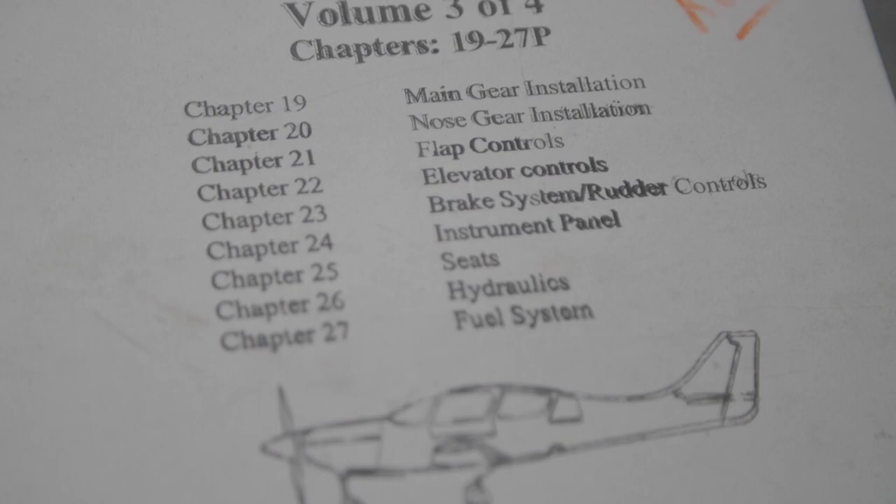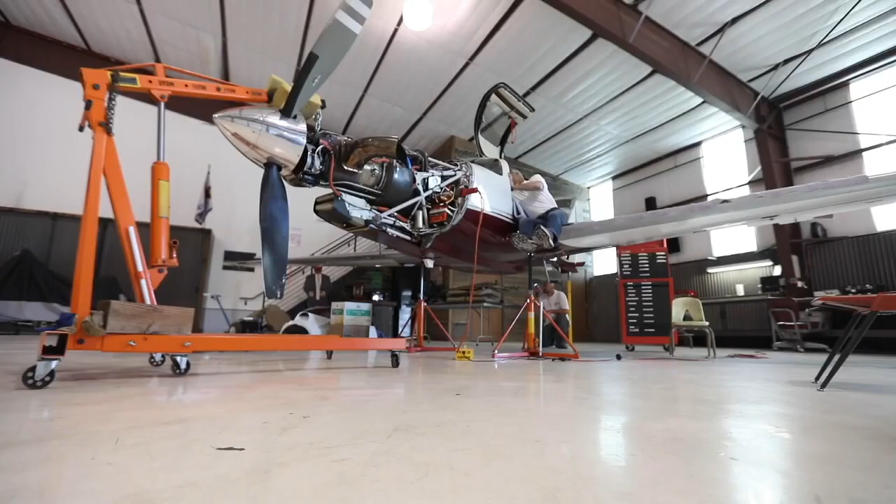I wanted to start a video and cut it up into segments to show you and illustrate some service work that should be done on all Lancair aircraft that have a retractable landing gear with the over center links. We have found there have been quite a few insurance claims over the years. Probably the majority of our claims are from the nose struts collapsing and the airplane going over on its nose, which causes a pretty good insurance claim, probably the largest claim across our fleet since these airplanes began being built.

I'm going to start by dismantling my airplane, taking the cowlings off, exposing the landing gear, putting the airplane up on jacks so that I can cycle the landing gear. I'll take you step by step through some checkpoints and service points, some recent modifications that Lancair has worked with us to come up with to make these nose struts more robust. Stay tuned and we'll go to the next slide.

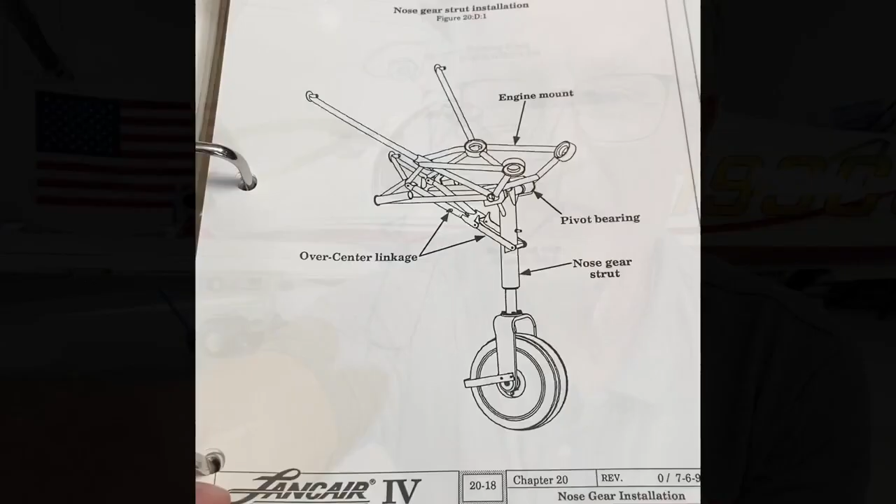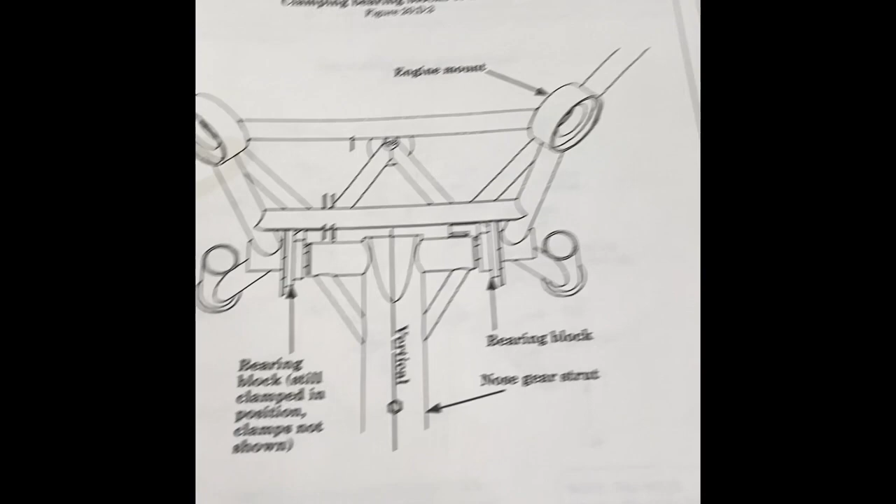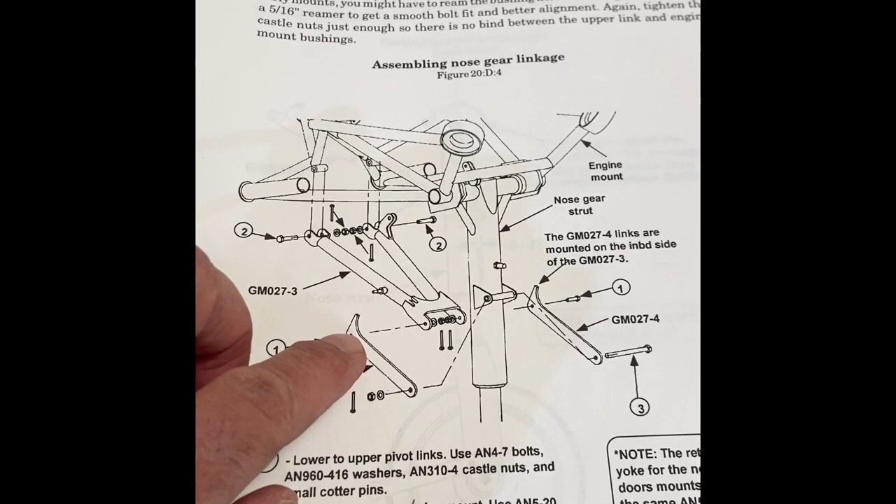Just to give you a little situational awareness, I have opened up the Lancair Build Manual, Chapter 20-18. You can see the over center links here, the upper over center link and the lower over center link. Here's a forward view, and we'll be talking about some space right in here and here that sometimes occurs and allows this whole strut to shift back and forth left and right. We're going to be replacing these with a much more robust fixture from Lancair.

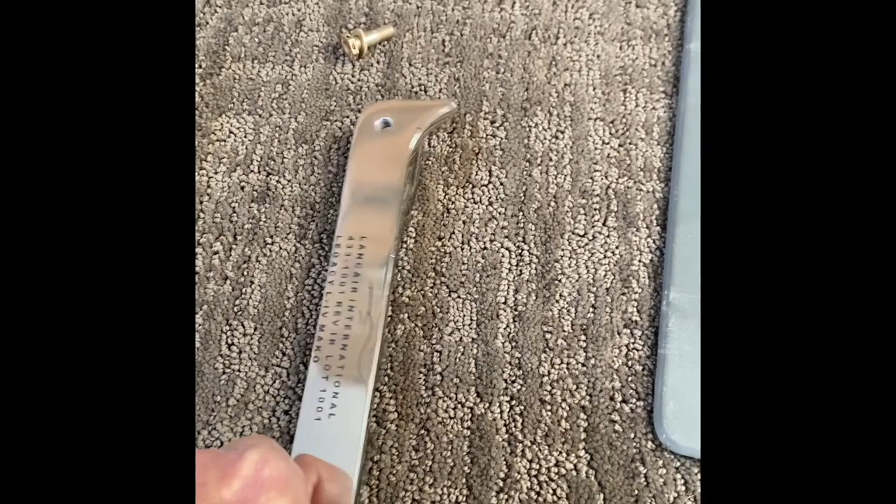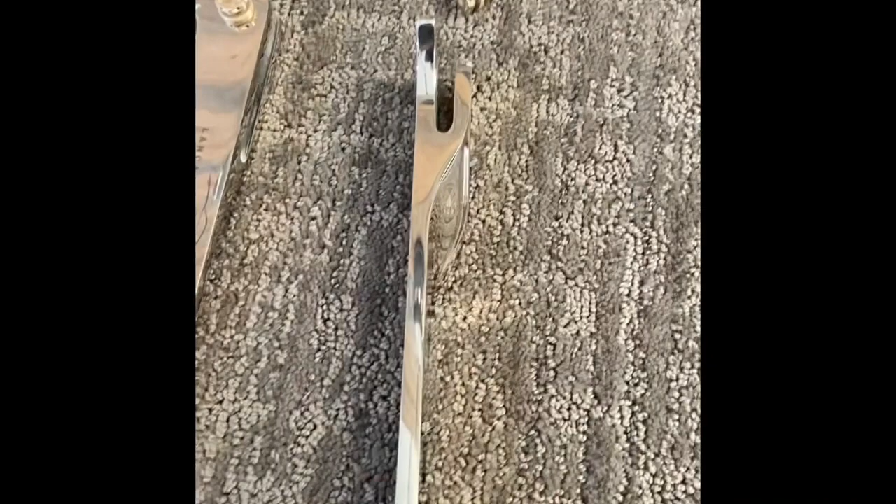Here's another picture of the side view of those over center links, upper and lower. Over here laying on my bench is the new, beautifully polished over center link. If you look at it sideways, you'll see how we've beefed it up. It's not just one piece anymore, you'll see it's now two pieces, equalizing the load on the bolt here, which was part of the problem in the past where the over center links have given way and the nose wheel has collapsed.

You can see that this bolt goes through here and screws in, and then it's safety wired into this hole here. I mentioned earlier on the strut, these are some spacers that have been homemade to take out some of the slop on both sides of the main strut mechanism.

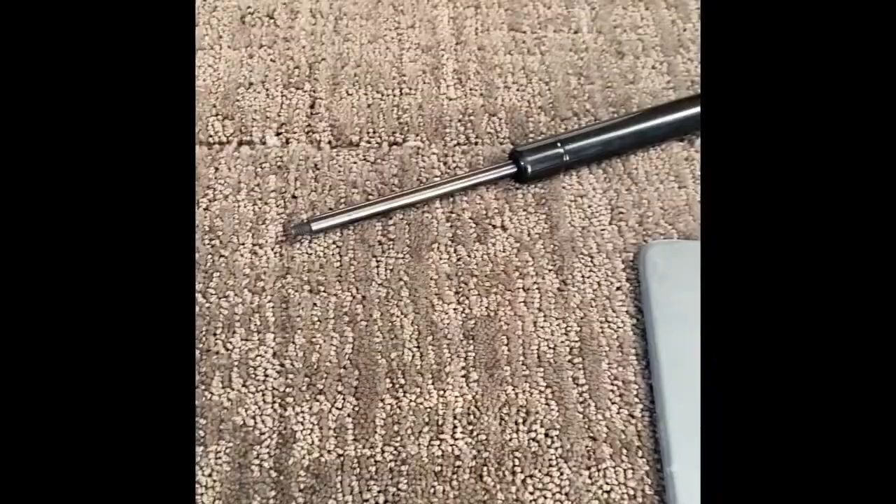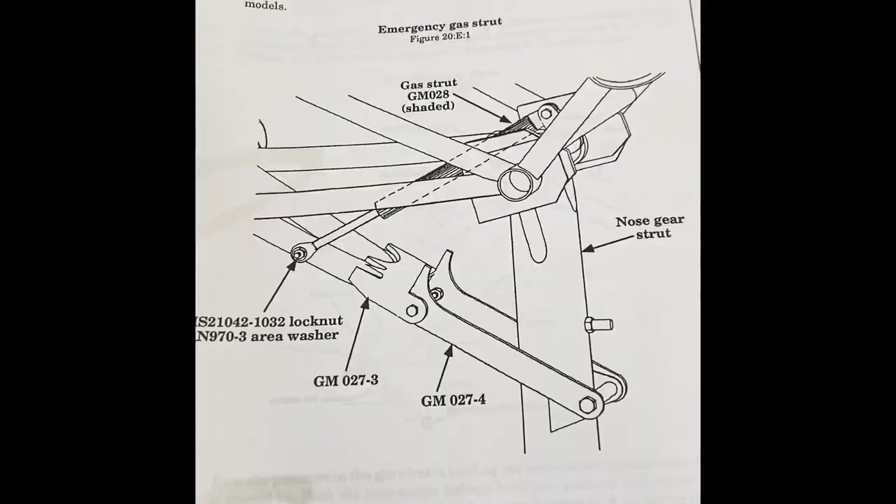A gas strut that we will be replacing, while we're at it, with a brand new strut, 100 pounds or more. Here's a quick shot of the gas strut we're going to replace with a brand new one. Periodically, you need to test that at annual or whenever you're servicing that nose strut to make sure it hasn't lost its pressure, because that's your emergency gear extension for the nose strut.

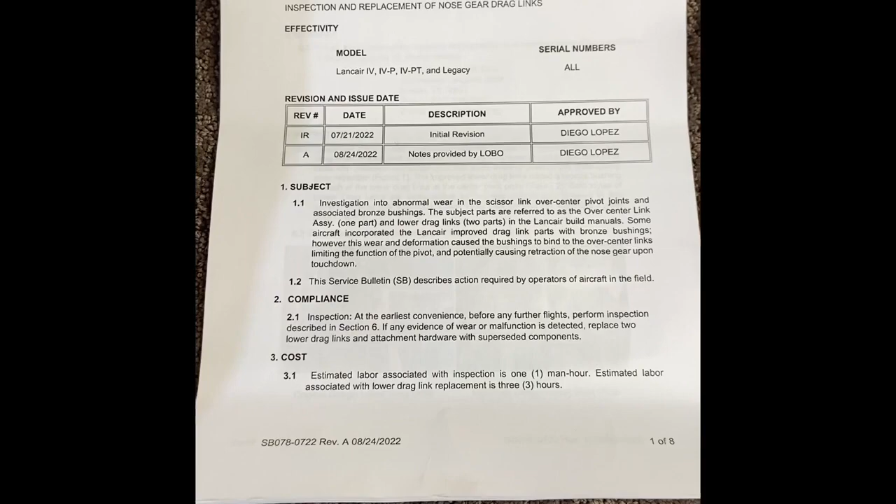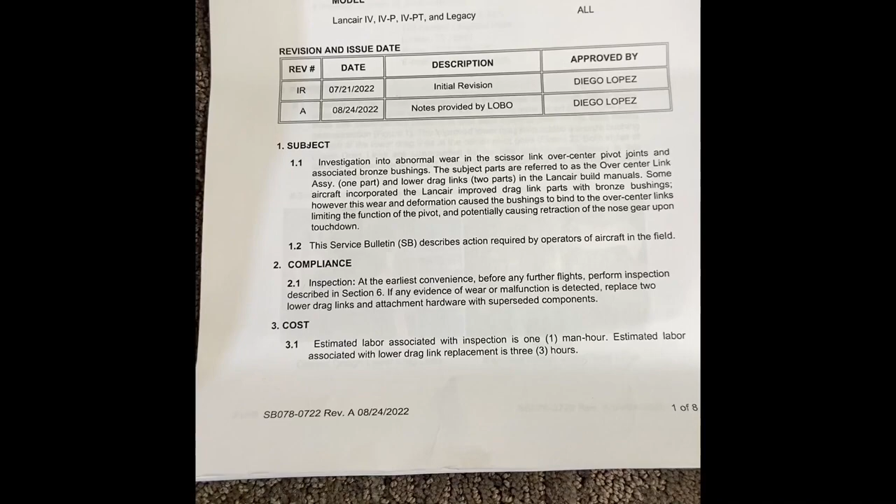At the end of this presentation, I encourage you to go to Lancair's website and make sure you download the brand new service bulletin 078-0722, which illustrates the installation and step-by-step process of what we're going to go through today. Just a quick overview of my airplane before we start removing the upper and lower cowling.

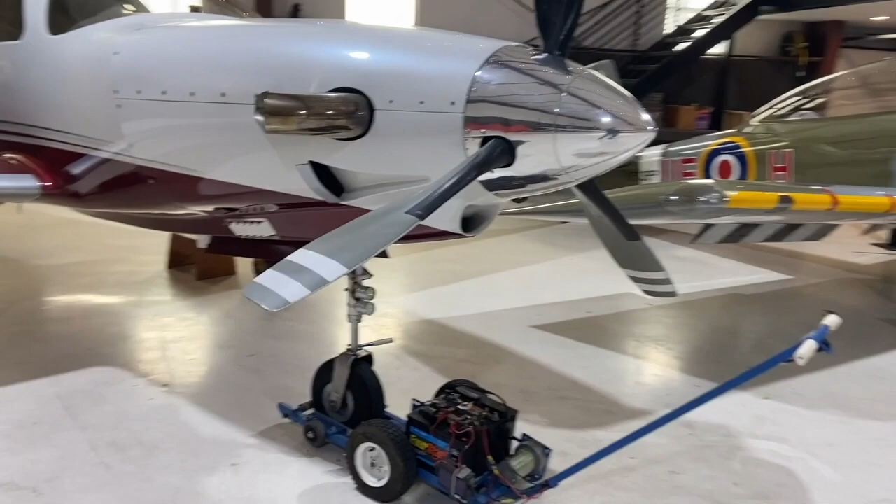I have now removed the upper and lower cowling and raised the airplane on its jacks, ready to cycle the landing gear if I need to. But for right now I'll just come into the airplane and show you a couple of the items and where they're located. Down here lower is the upper and lower over center link, and this is the lower center link that we're going to be changing out.

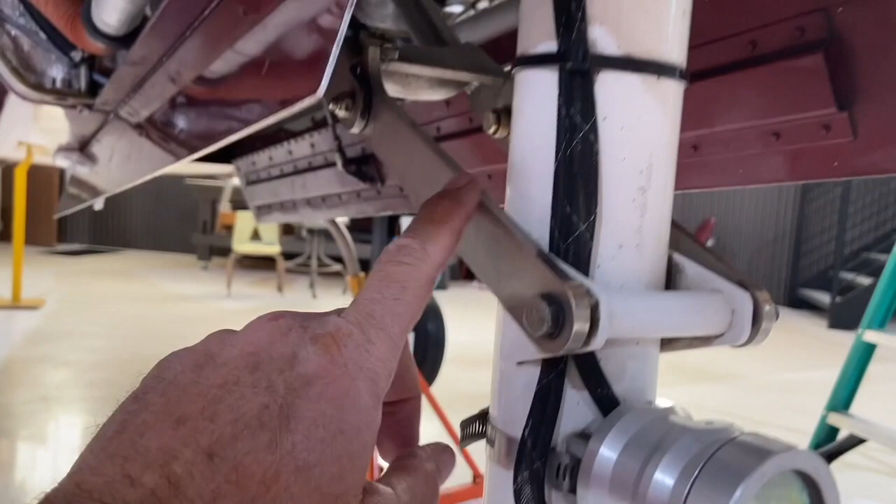Right here is where the problem has been, with wearing out and getting too much slop in this joint right here. This is the upper over center link right up here.

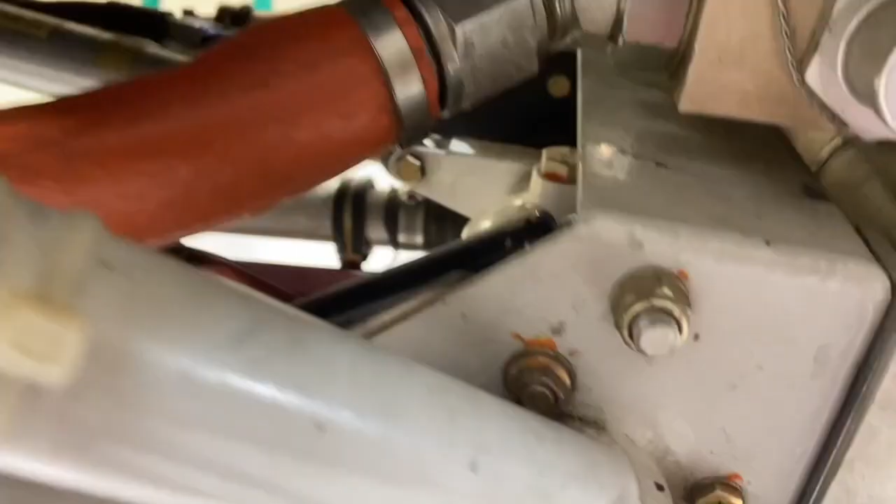See the black cylinder right there? That's the emergency gear extension piston that we're going to change out. It's good to change those out every now and then and check the pressure on them. Right behind it is the silver cylinder, let me see if I can get to it, that is the main hydraulic actuator for the nose strut.

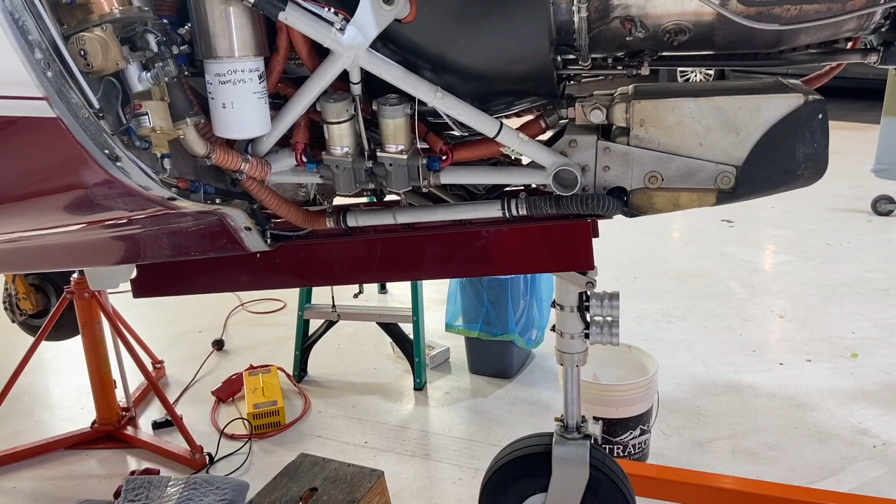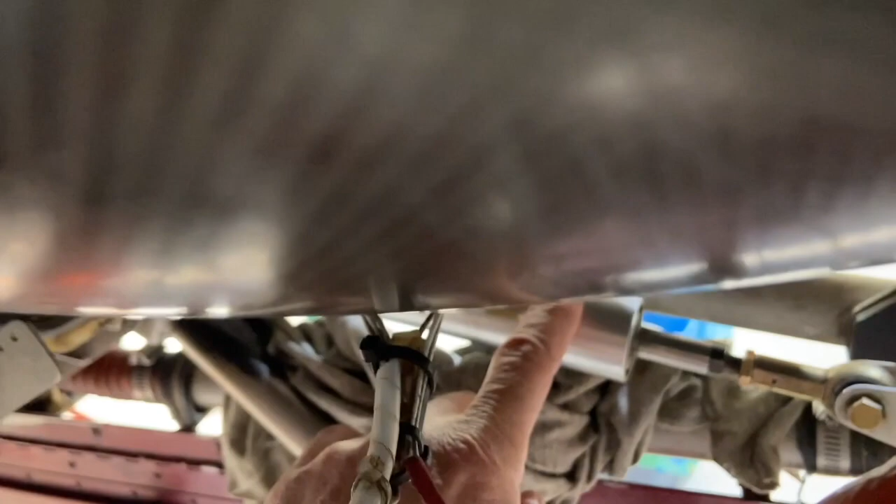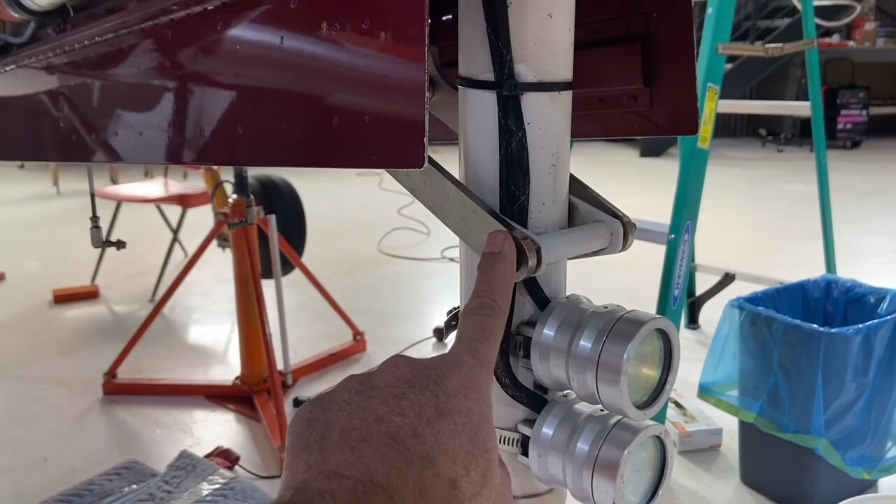Okay, it's time to remove the emergency gear extension strut, the gas strut, and I'm going to point to it here real quick again, right here, this black cylinder looking thing. Now before I do that, if you look across the way, I've disconnected the main hydraulic actuator for the nose strut, disconnecting hydraulic lines forward and aft to take all the hydraulic pressure off the system. I also need to remove the AN5 bolt here to give myself a little room to move the over center links and get the pressure off that gas strut so I can remove it.

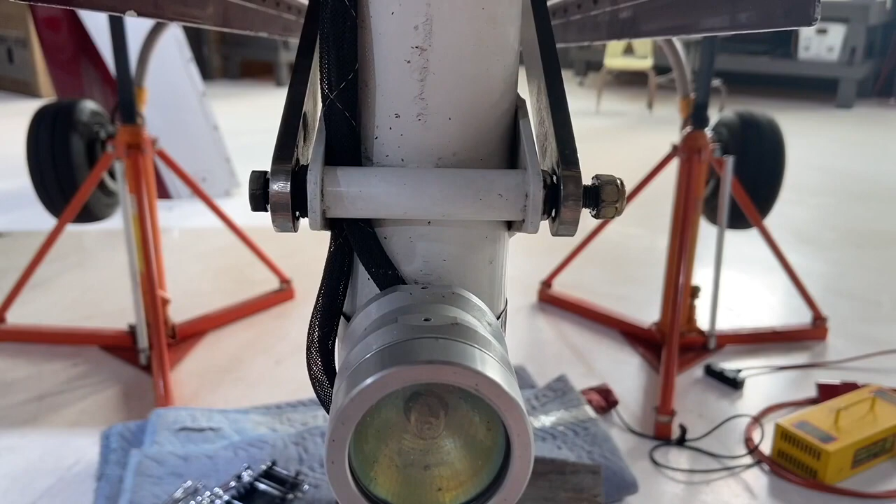Looks like on this AN5 bolt we have the bolt head, of course, and then a washer, thin washer, and a thicker washer on this side.

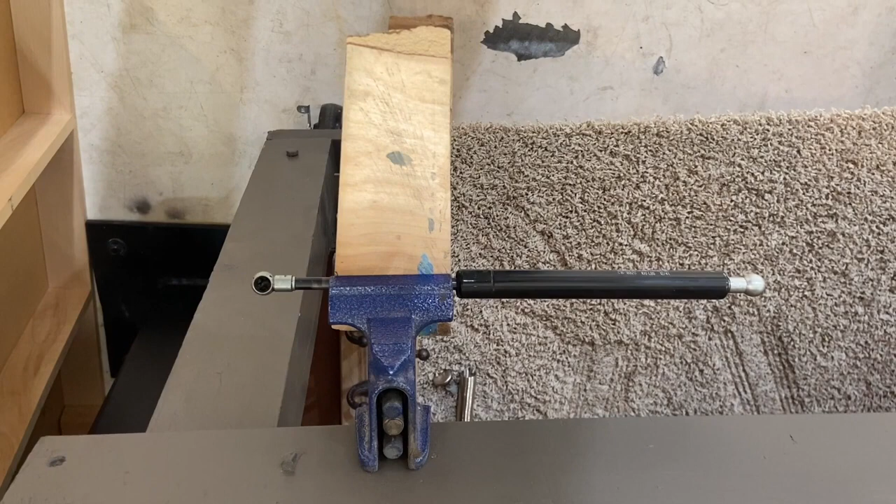I have now removed the gas strut and need to remove the fittings on each end. I have it on a vise squeezed between two little pieces of wood so I don't damage the cylinder.

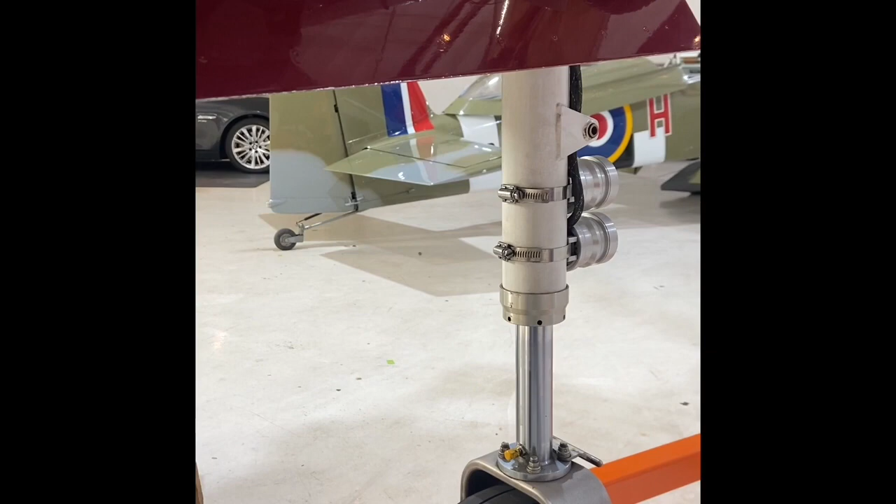I am going to check from side to side the main nose strut and the pillow blocks. It appears I do not need to shim anything inside because I only have maybe a 16th or a 32nd of play up in there, and I don't think I can improve upon that.

Let me see if I can get my camera up there to show you what I'm going to be doing. Up here are the pillow blocks right here on both sides, on either side.

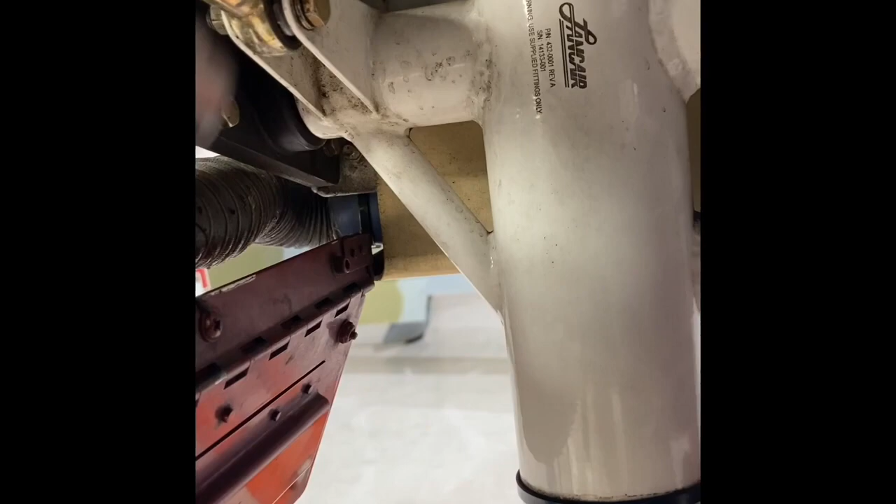I'm going to take the nose strut and try to wiggle it back and forth and see if I can find any play. You maybe can hear a little clicking, but that's all I've got is a little bit of clicking that might be a movement of a 32nd of an inch.

So therefore, I'm not going to take that apart and put any kind of bushing in there because I don't think I can improve what I've got.

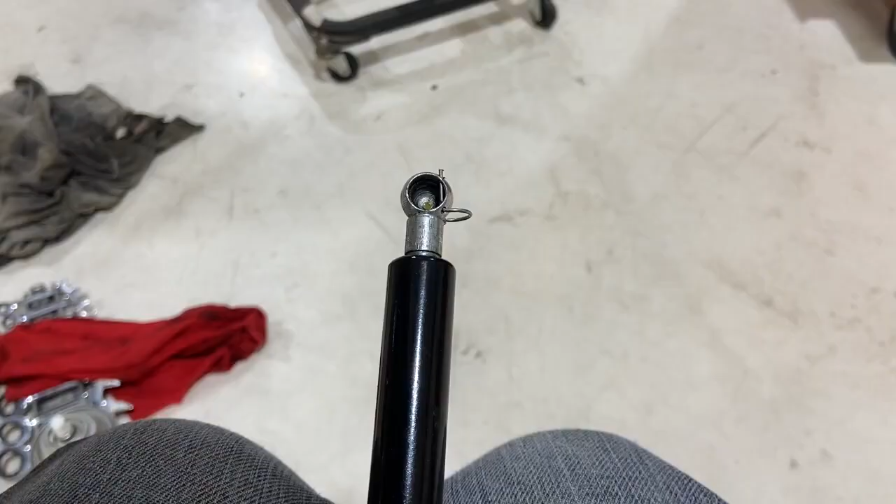On each end of the gas strut, I might illustrate, because this can be kind of annoying getting this in and out. You want to put a little dab of grease on each ball before you reinsert this.

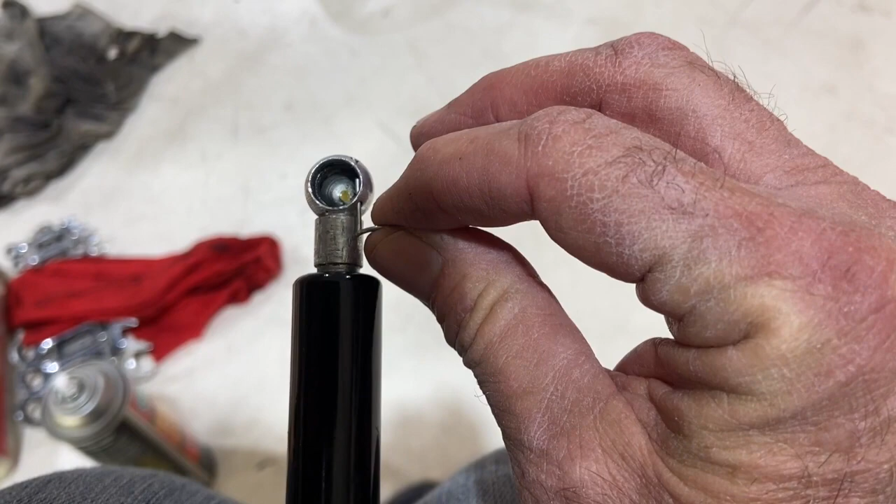But if you look at this little pin here, once you install it and push it all over the ball, this is the keeper pin that goes in there, and it can be really difficult to get through the other side, and then it swings around and snaps in.

I'm not doing a very good job. There we go. And then it goes all the way around and snaps in on the other side, and that's what keeps the ball from coming out of the retainer.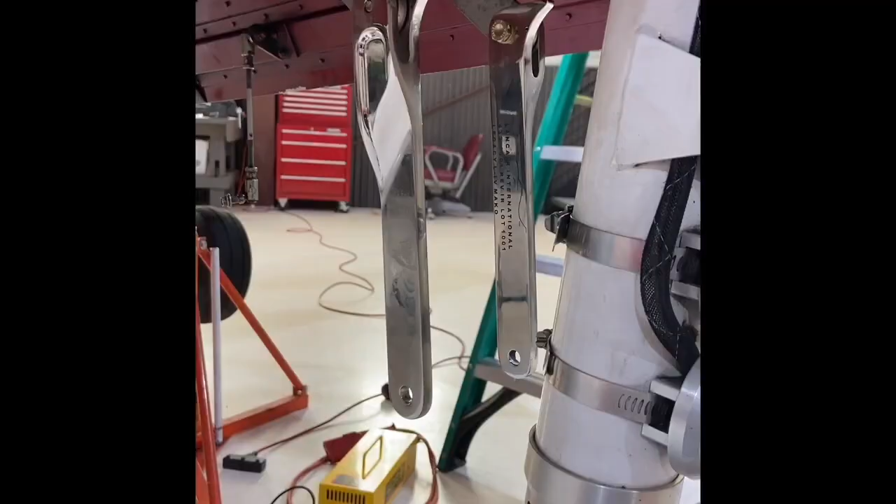I now have the new lower over center links installed, and I've not put the safety wire on yet, but I want to point out something.

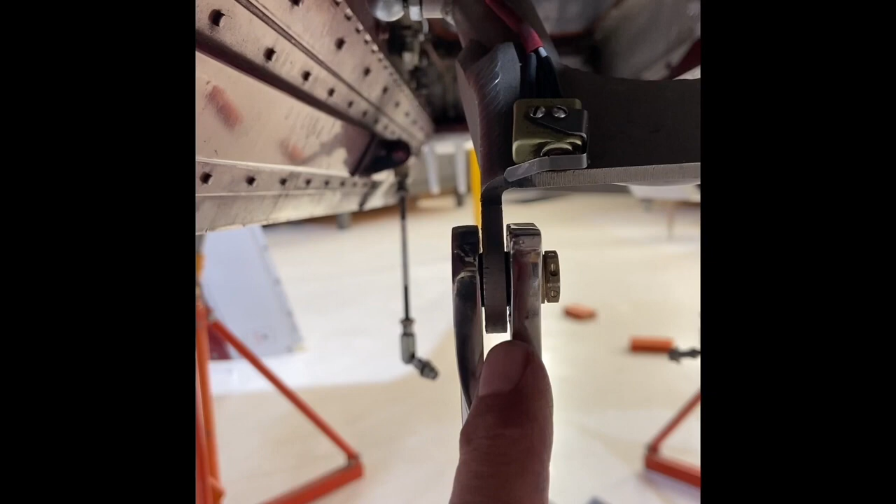When you install these, there are two thin washers, if you can see it, between. It's hard to put in, but I recommend putting a thin one on both sides instead of a thicker one on one side.

Now, the trick to do that is you need to put a little grease in there anyway. So put a dab of grease on both sides, stick the washer on there, and they'll kind of hold them in place while you run that bolt through.

Okay, I just wanted to show you real quick. I snugged up the bolts just tight and then backed them back off. You don't want to get them too tight so they will swing back and forth like this.

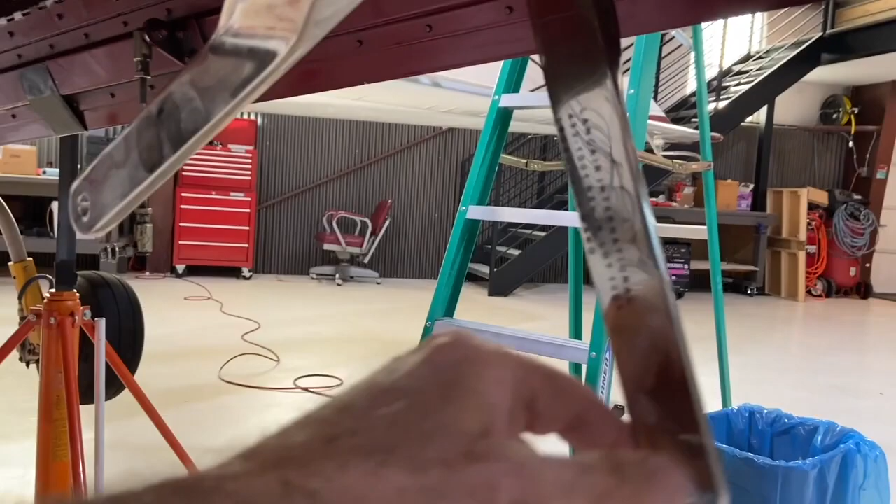Okay, and then don't forget the safety wire. See there? Okay.

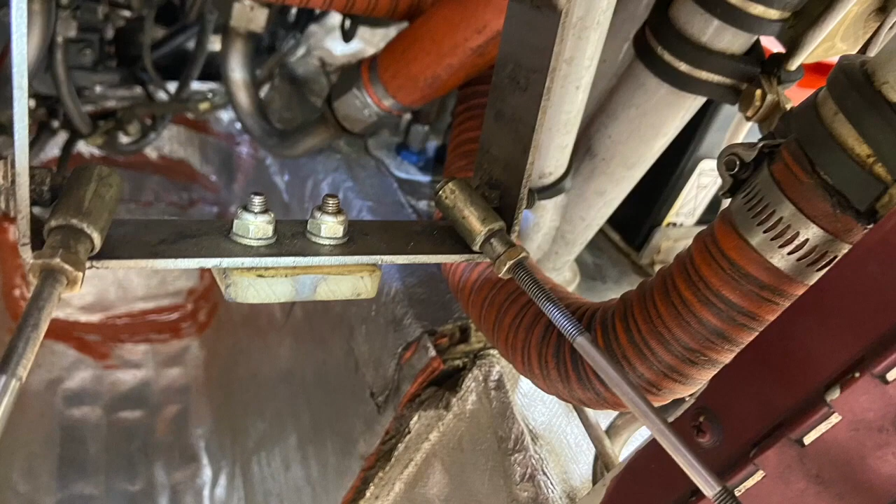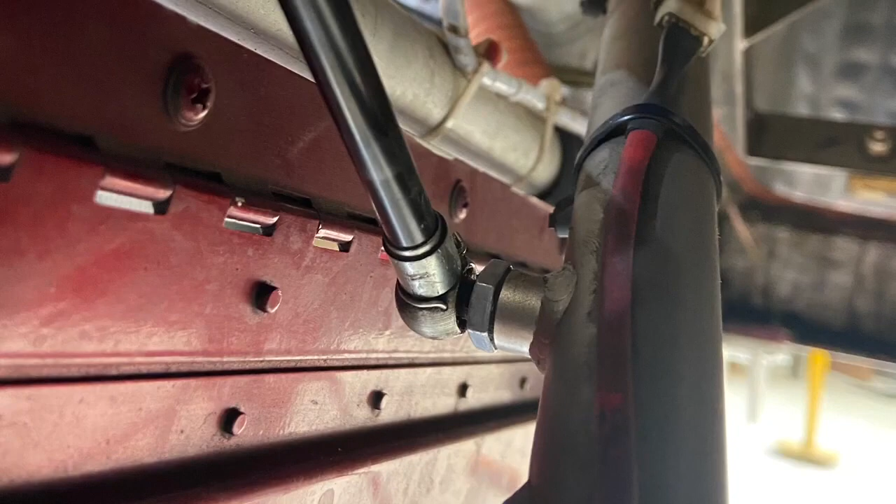As you can see, I still have the airplane up on jacks. I'm ready to test the full cycle of the landing gear up and down. I'm going to do that here in a minute on another video.

I also want to test the emergency gear extension. But before I do that, I might review real quick what I've done today to make these changes to the nose wheel strut.

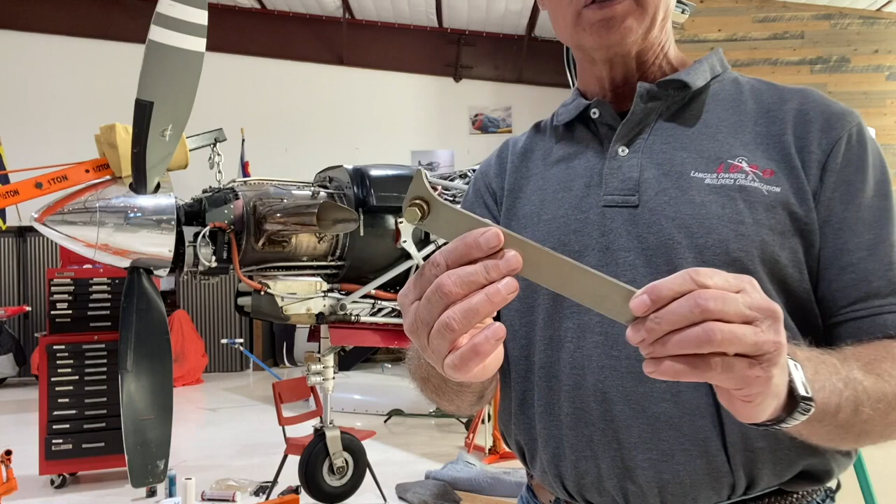I'll start by saying what we did was we changed out the old over center link, also known as drag links, the forward one, to a more robust one.

If you remember, it had a fork in it, and the new ones are much more heavy duty.

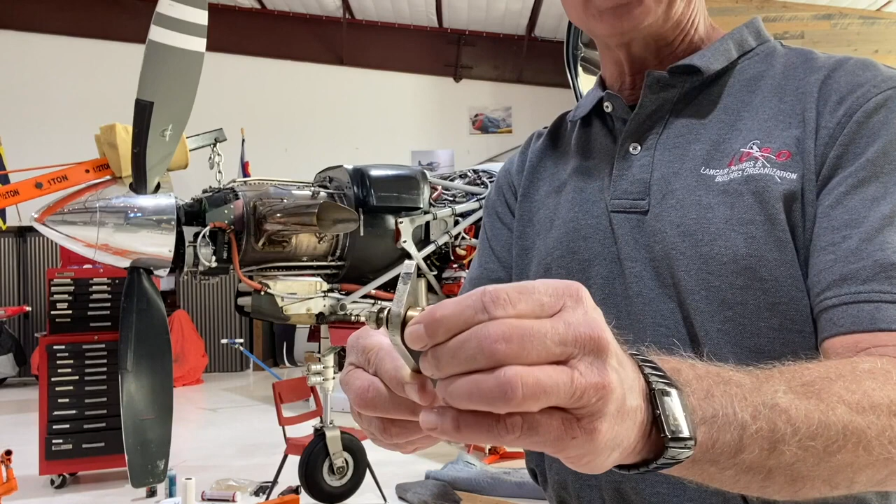This is the old one, and it has a brass fitting in here that has tended to wear very quickly from side to side. It's a softer metal, and we realized that that's not the way to go.

That's why we've upgraded. Also want to emphasize when you jack the airplane up on jacks, make sure you support it with some kind of stand and don't rely on the hydraulics of the jacks.

The engine stand I use will leak off, and I've had this supported with angle iron for the last 3 days and it hasn't moved a bit.

I ordered about 4 of these brand new several years ago just for stock. This is the gas strut for the emergency gear extension.

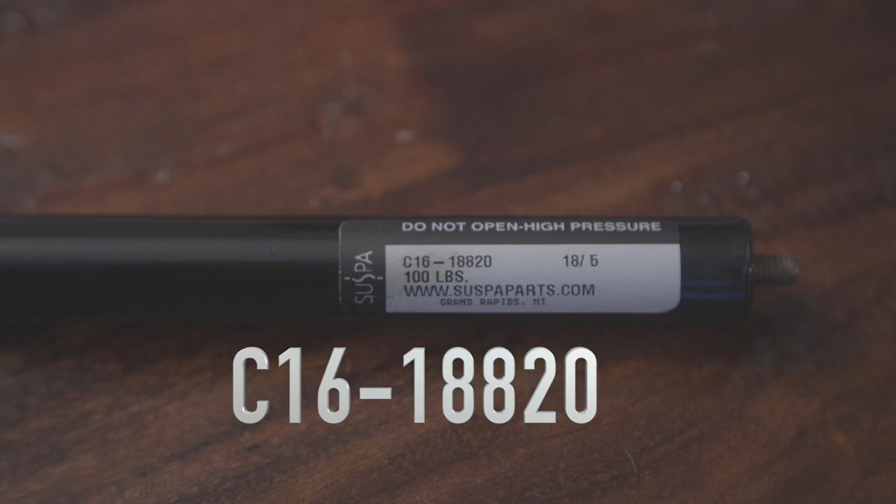You can get it from suspaparts.com, and the part number is C as in Charlie 16-18820, rated 100 pounds. I'll show it there so you can make note of it.

I'd suggest they're not very expensive. I don't know, it's been too many years, so I don't know how much they cost, but I'd have 3 or 4 on hand so that you can change these out at annual when you need to, because they do wear out.

I had to replace some recently on my wife's car on the hatch in the back. It was just flopping. As soon as I replaced it, she was happy. She made me dinner that night.

So one of the first things we did was bleed off the hydraulic pressure on the system so that we could disconnect all the connectors.

And the first one you want to disconnect, we talked about earlier, is this one here in the front, the main one that attaches to the nose strut.

That way you can move it and have a little more play to loosen it up so you can get everything else off. Okay, I'm ready to do the gear retraction test.

I already have the gear lever in the cockpit in the up position, but of course it's not going up yet because it doesn't see any airspeed, which is a safety device for my particular airplane.

In order for me to simulate airspeed, I've got a tube placed into my pitot tube, and I'm going to blow into it, and we'll make the retraction happen.

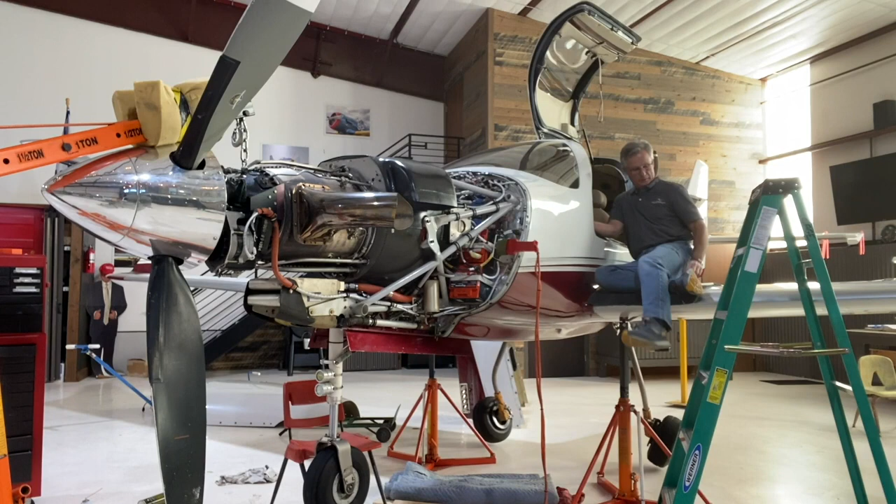Here we go. There we go, it all went down very nicely. I have retracted the gear, and I'm going to simulate emergency gear extension.

In order to do that, you have to pull the circuit breaker for the electric hydraulic pump, simulating that you've got a pressurization problem, either hydraulic pressure or your pump's gone out. So I'm going to crawl up in the airplane and put down the emergency gear, which is that gas strut that pushes the nose wheel down that we changed out a little bit ago. Let me jump up there and we'll put it down.

My system has a nitrogen-filled bottle that pushes the emergency gear extension down on the main gear. Many other airplanes, like Lancairs, have a hand pump to pump it down, but my particular system does not use a hand pump. It uses nitrogen gas that's charged up within a canister. So here we go.

And I got 3 green. Gear came down and locked. I did notice when I put in that new gas strut and got it positioned and bolted back in, how much stronger it was compared to my old one. There was a definite difference, which gives it more speed to push that nose wheel down in the event of a hydraulic failure.

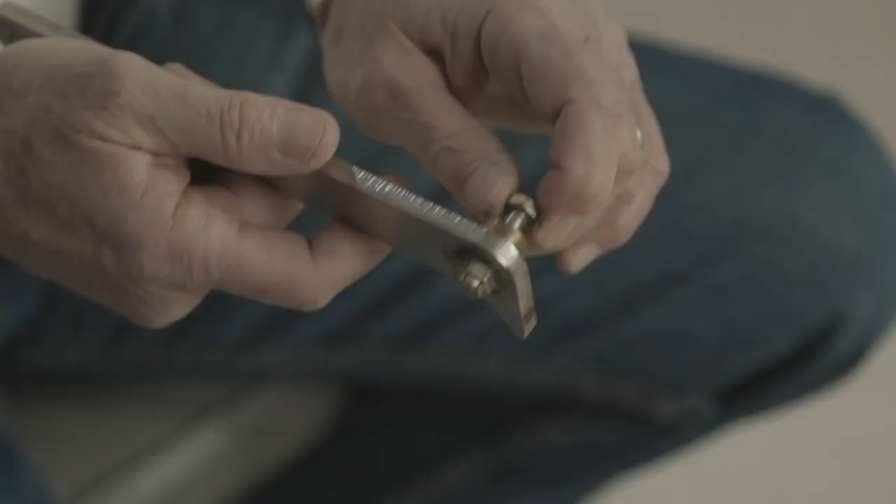The over center link, the Achilles heel, typically fails when the lower connection starts wallering out. I've already replaced mine on my airplane, as you saw earlier in the video. If you have one of the modifications with the brass bushing, that brass is soft - we found out quickly that it will fail quicker than anything else put out from the Lancair community. They later came out with stainless steel, which is better and won't wear.

We feel the latest service bulletin has come out with the forked design. You'll see how robust it looks, and it does not cause torsional stress on that bolt, but rather a conventional straight-on stress that will not wear nearly as quickly.

Recently there was an accident in the northeast part of the United States. We don't know for sure, it's too early to say what the cause was, but we do know from the tower tapes it was a Lancair 4P turbine converted to an LX7, with a PT6 engine, which is a little uncommon - a huge conversion for the 4P platform. Regardless, he was cleared for takeoff.

He aborted that takeoff after rolling down the runway, for whatever reason, and made a comment to the tower that he had a landing gear issue. We don't know what that issue was. In 3 to 5 minutes or less, he was cleared for takeoff a second time, and that time he went off the runway. How much airborne, we don't know, but he crashed on the field just off the runway. The pilot survived, but the airplane was totally destroyed.